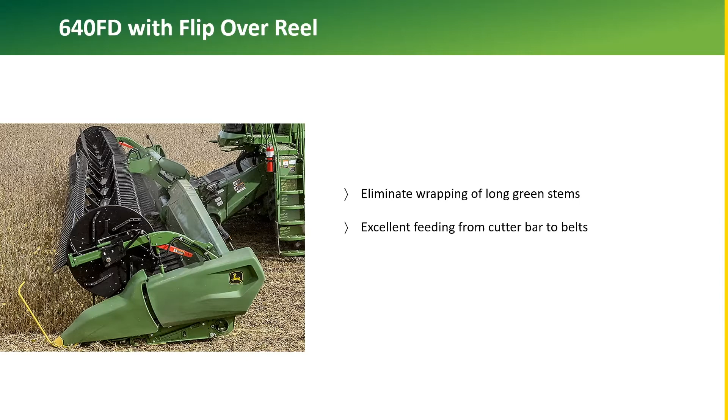Dry beans with tough green pods and stems were also a problem this year, causing some threshing or separating issues. Poor grain tank sample like this one can cause serious issues for storage or a sizable discount when selling at the elevator.

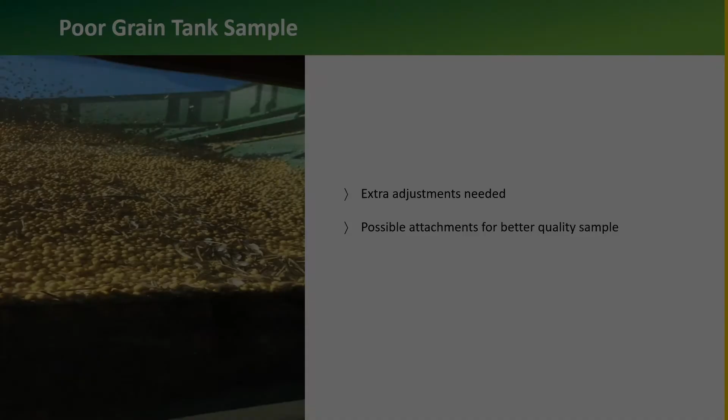These are key setting points for tough threshing separating beans that came up in our discussions. Multiple adjustments may be needed to cure this issue. Also, make one adjustment at a time and verify results, as if you make multiple adjustments, the results can worsen without knowing which one of those adjustments really caused the problem.

Make small incremental adjustments, sometimes an adjustment as small as 1 millimeter on the chaffer sieve or concave, or 20 RPMs on the rotor can make a very big difference in your quality. Tighter concave versus faster rotor speed seemed to be a noticeable difference this year, according to many reports.

Keeping the machine full as much as possible is another key to consistent threshing and separating, so pushing your cutting ability can make a difference.

This is an important consideration when it comes time to maintain your header's cutting performance, or the time for you to trade heads and match the size of head to your combine, as too small a head or a poor cutting ability can cause you to not be able to get enough crop in to fill your combine completely.

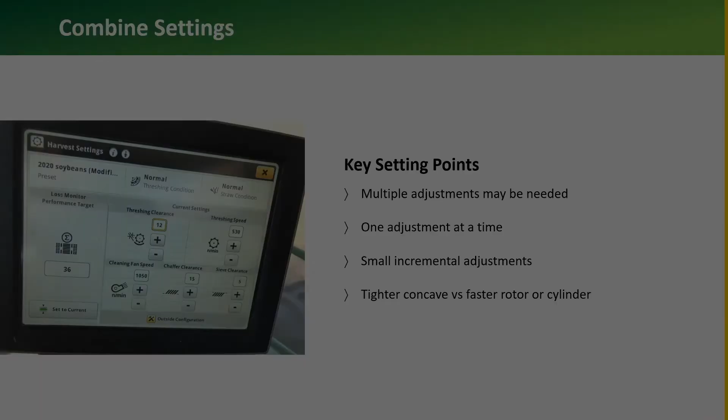Another solution that is starting to show up in conversations is a set of Kondex Revolution half-width concaves. These concaves were introduced to us at Aftermarket Expo in 2018 by John Deere as a solution for tough threshing conditions.

Shown here is a coarse grain configuration with one max thresh and one max round that replaces the first concave, followed by factory round bar concaves in the second and third positions.

Personally, I was intrigued by these concaves from the start, but last fall and this fall are the first years I have had the opportunity to get firsthand customer feedback on how they work here in West Central and Central Minnesota. The feedback I have received from local customers as well as technicians has all been very positive in beans as well as in corn.

The key factor being more aggressive threshing early in the threshing area, which also helps the separation by getting good grain out of the material mat earlier, creating less chance to carry through the combine. These concaves are available for all STS combines and can be ordered as a factory installed option in the 2021 S Series combines.

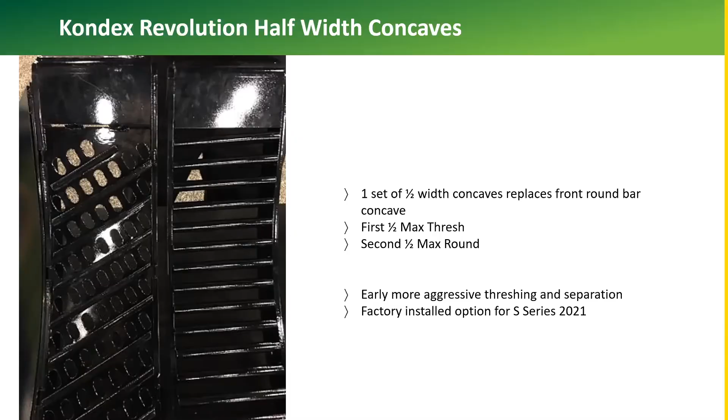Short soybeans holding on the cutter bar and not feeding well seems to be an issue every year in one area or another. We have seen many aftermarket reel additions that seem to work or not work over the years, but the one that always has been greatly helpful is the addition of an air system to your cutting platform. Whether you are using a traditional flex head or even a draper head, it has been proven that the air system can help move that crop from the cutter bar to the auger or belt very well.

Over the years, we have installed either AWS or Crary systems with very good results on both. These companies advertise crop savings at the cutter bar, which is very true. But from our experience, the biggest savings may be the even feeding into the combine, which carries all the way through the combine, reducing slugging loads and separation issues that go along with the slugs.

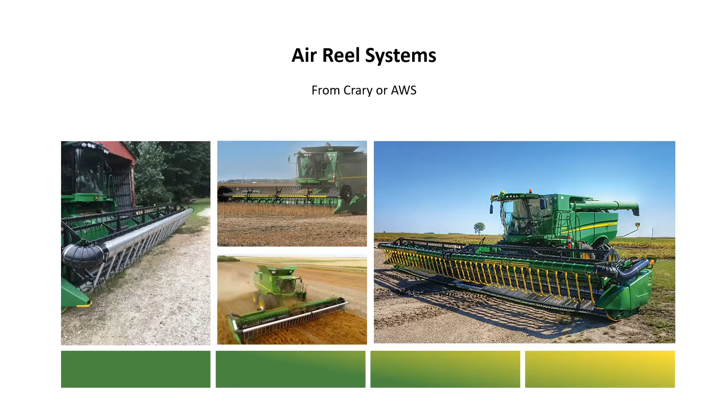This even crop flow will also be a big factor in the earlier discussion of settings and grain sample quality and grain losses. It does take power and fuel to run these air systems, but if header grain loss, bunching at the cutter bar, and slug feeding are causing losses, it may be a very good return on your investment. Not to mention the extra hour or more per day of combining you may be able to obtain by feeding evenly on those tough mornings and evenings.

High tailings loads, plugging tailings was also mentioned by customers and technicians this year. Again, this comes down to a combination of multiple settings and possibly multiple attachments. Excess threshing speed is one of the main factors, along with concave clearance, fan speed, and chaffer and sieve openings.

The issue of too much rotor speed causes severe stem breakage and overloads the cleaning system, making for a wider chaffer setting to save the grain, while overloading the sieve and tailing systems. A better setting seen this year seemed to be a tighter concave, lower rotor speed, and possibly the change to a convex concave, which helps to reduce the overthreshing.

If overthreshing is not the problem, fan settings, chaffer and sieve settings are the available cures for this issue and can take several tries to get the correct combination, paying attention to making small adjustments and verifying the results of those adjustments.

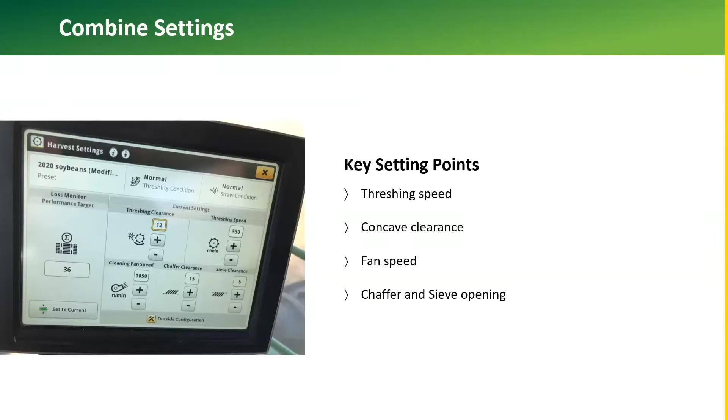When it comes to chaffer and sieves, there are also options to help you. In 2014, the S600 series combine started coming with a dual zone chaffer. The purpose of this rear section was to be able to close the rear section down farther, effectively forcing more air up front for earlier separation, therefore helping reduce tailings loads.

Factory recommended settings are 5 millimeters open on level land and 10 millimeters open on hills. But in many cases, we have seen completely closed works very well in beans. This chaffer can be retrofitted to all S-Series combines, and from my experience is very worthwhile as the cleaning fan blast always seems to be on the low side.

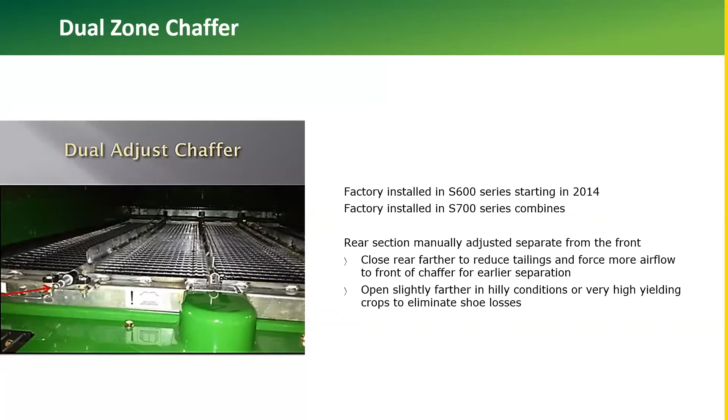In beans, maybe the most helpful change as far as clean grain tank can be the addition of change from a deep tooth chaffer and sieve to a general purpose chaffer and sieve. The smaller openings, more louvers can filter material better as well as maintain that better air blast to suspend chaff out the rear of the combine.

These are also good in the majority of central Minnesota corn combines, with the exception of very high yielding crops and the operator that is pushing for maximum bushels per hour.

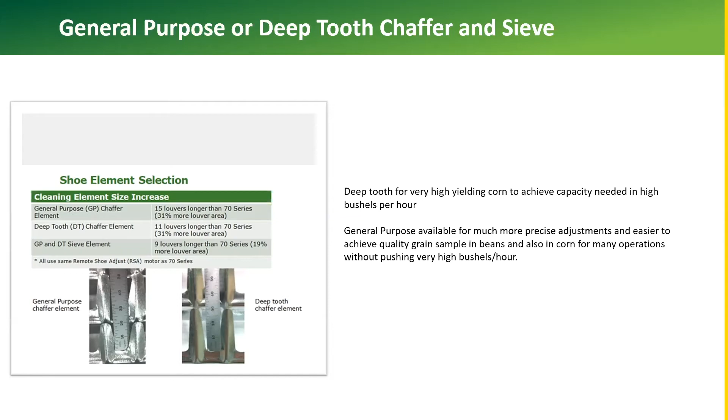In contrast to the earlier grain sample picture, grain samples like this one from a local customer are achievable with the time and effort spent to maximize your combine and its settings.

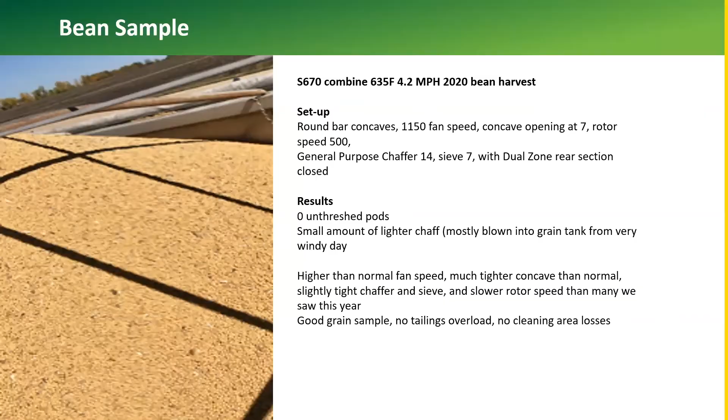The last bean challenge we have on the list for this year is plugging of the discharge beater. This has normally been a problem associated with edible beans because of the early season and the low rotor speed used to maintain grain quality, but can also show up in a year like this in soybeans with tough stems and no early frost in most areas.

For the 30-inch rotor in an S-Series combine, there is a kit available to add discharge flights to the rear of the rotor. This is easily installed and highly recommended if this issue has ever stopped your machine or if you combine edible beans.

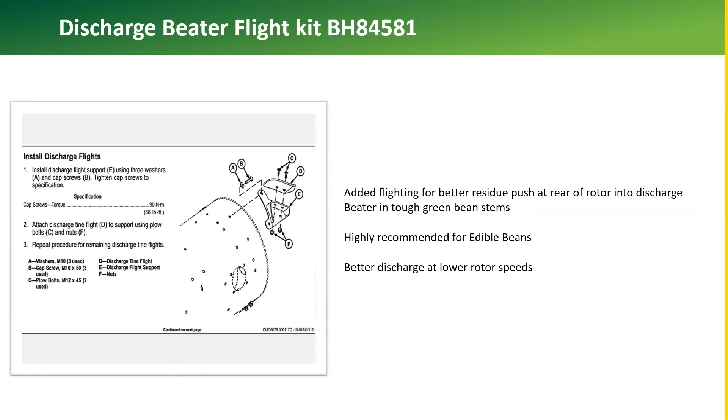As far as corn issues this year, I would say the list of issues is much shorter for most of our customers. But as always, there are still some issues that show up. Cob in the grain tank sample seems to be our largest challenge year after year with the S-Series combine.

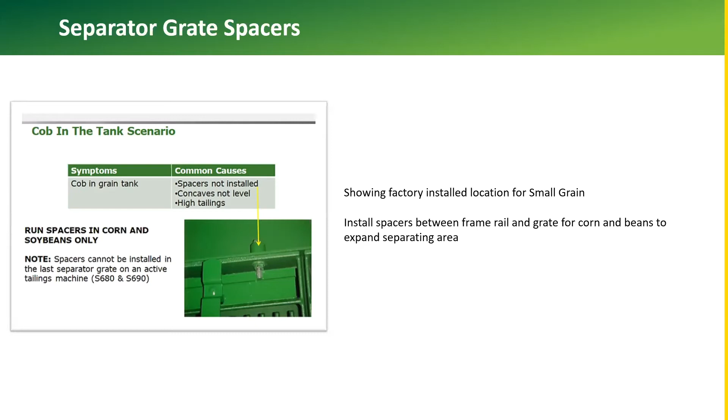If you do not have spacers in your separator grates to increase separator area, it would be a good start, along with making sure the concave is level. Also, the same idea applies to keeping the rotor speed low.

And making sure the concave is set to the correct opening to match cob size. The Kondex concaves have also been mentioned by customers as helping by aggressively threshing early to lessen the need for tighter and faster threshing settings.

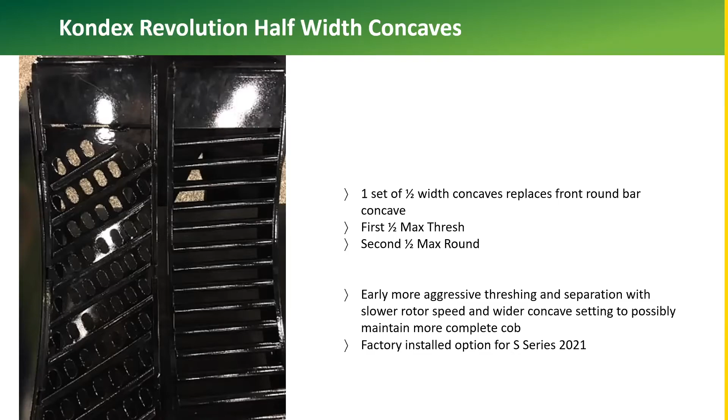But as years go by, and we have seemed to deal with this issue every year, more and more indicators point to many of our issues coming from much farther forward in the system than most of us originally thought. Having run the X9 1100 combine this year, as well as working with many customers and factory reps over the years, we have seen definite improvements in grain tank sample quality by paying attention to all the factors forward of the rotor. Starting at the front,

corn head settings like stripper plate opening, auger height, lower header speeds, and retrofitting auger floor inserts can help in many cases. In the feeder house itself, an even lower speed sprocket than the slow speed factory installed can be purchased through parts.

Kits for older combines that lower the stone trap feed plate and reversing feeder house slats to have smooth edge leading can also be an improvement.

Moving back to the feed accelerator, there are options of swept back or smooth wear plates that can cause less kernel damage while still providing good feeding action of material to the rotor. Those are several items that have been shown to make improvements before getting to the rotor and its settings required there for threshing and separation.

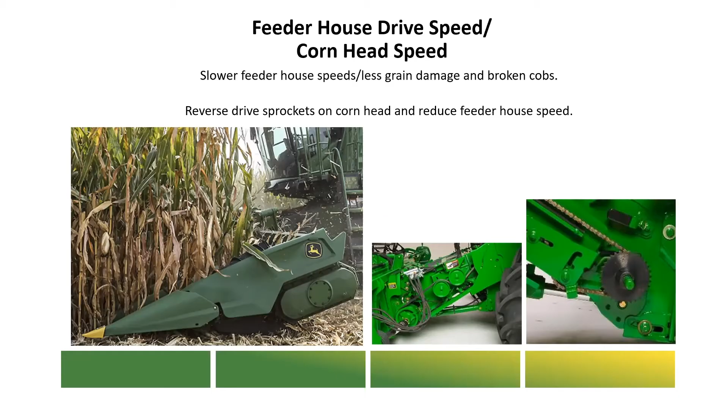We always hope for drier than normal grain sample, but it can also cause a few issues from time to time, such as fines in the grain sample or a specific cob being still too spongy, causing the cob to split before releasing kernels.

Every year, there seems to be at least one or two corn varieties, maturities, or stressed fields that cause this nearly impossible threshing problem. This year was no exception. The problem is recognizing this issue and finding out where in the process the problem is occurring.

The best investigative method is to use a power shutdown, which gives you the opportunity to examine the crop on its entire route from the head to the discharge of the combine. Many customers have mastered this, and many still struggle, but the power shutdown is a very helpful tool.

If you are unsure the steps involved, a good place to go is the John Deere App Store and download the Go Harvest app. This app contains a complete guide to adjustments as well as the step-by-step process of doing a power shutdown. Or if you are still having problems with this, contact us at Midwest Machinery and we will help you find the correct information.

After using power shutdown and exhausting all the other procedures we have just discussed, you may still have an issue where a particular cob is just too spongy to allow good threshing without the cob exploding into small pieces.

This year, I talked with one customer who had exactly this problem with corn that was only 21% moisture, but the cob was so spongy and split so easily, it was nearly impossible to separate all the kernels. Going through every available option and still having loss levels unacceptable, he called his seed rep, who said he had heard the same comment from another customer.

High trash intake and separation issues are more of what I expected to see in a year like this, and it was present in many cases.

Deck plate spacing and proper corn head or feeder house speed are the two common settings to work with on this issue. Although I think one of the most common issues we have seen over the past few years for this problem is worn stalk rolls. Many times we don't even realize the amount of wear on our stalk rolls, especially with a chopping head, because in general it strips stalks down through the head very well, using the extra pull of the chopping knives as well as the stalk rolls themselves. Or in many cases, we just overspeed our head anyway to make sure we are running fast enough to do a good job of chopping.

But if you are looking to replace stalk rolls, there are options that have different fits for your normal crop situation. A chart like the one shown here is available in the sales manual with different stalk rolls and their strong points, to help you in your decision on which one to install. Considerations like power consumption, residue sizing, trash intake, and normally wet or dry stalks are part of the discussion.

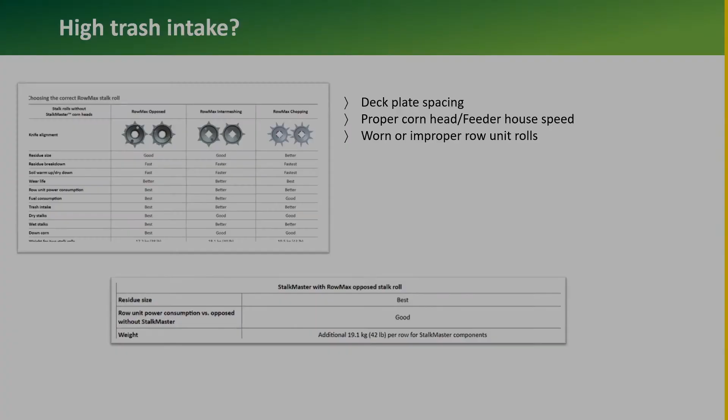When trash intake cannot be eliminated, the issue normally becomes loss of crop out the rotor. The best option I have seen to help with this issue is to install one heavy-duty separator grate in the front grate position, along with 4 interrupter bars or more spaced throughout the grate. This is a cast separator grate with bolt-in bars, originally produced for rice, but works well in other heavy crop situations, adding an interruption to the crop flow for better separation. The second option is faster rotor speed, which causes other problems. The heavy-duty grate with interrupter bars can be a very worthwhile investment.

Yield monitor accuracy also never seems to completely leave our discussions. The introduction of active yield has replaced the need for calibration of the yield system. Using the mass flow sensors and a set of weigh pads in the grain tank, the system adds a calibration automatically when the grain tank is emptied and then refilled. There are several criteria that need to be met, such as not being on a side hill, having a consistent input, being completely emptied, and then refilled beyond 6,600 pounds. Once these have been met, a calibration will be entered into the system, comparing the mass flow estimate with the active yield estimate.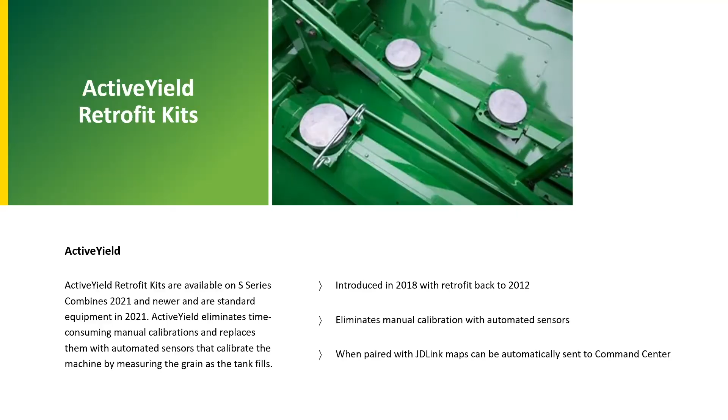John Deere's best practice says the system should have all previous loads deleted when starting a new crop and let the system work until several calibrations have been registered. While doing this, some loads will be eliminated from the calibration process because of the issues I mentioned, but throughout the day, many loads will be captured. Then a simple correction of a percentage over or under can be entered to match scale weights.

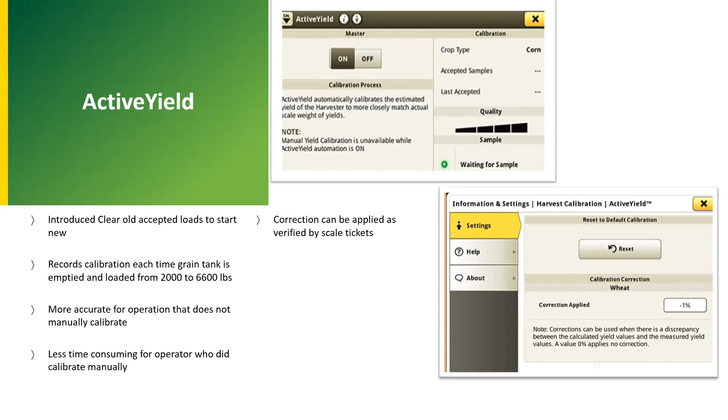This year, I heard mixed results on accuracy of the system. From one customer saying all crops were within 1% of what scale tickets showed compared to the yield monitor, to another customer that had to enter an 11% additive to get good readings. That being said, the simple correction of a percentage over or under is still easier than several manual loads of calibration. The other thing to remember with this system is that while it may vary from load to load, it is really more accurate when looking at field by field totals on a large scale.

Tillage this year seemed to focus around residue management, soil compaction from previous wet years, and a tillage angle as it relates to high-speed planting.

A relatively new tillage piece for us this year was a 2680H high-productivity disc. This machine features two gangs of individually mounted discs with 10-inch spacing, with the front rank at a 17-degree angle and the rear rank at a 14-degree angle, and a working depth up to 6 inches. This is a very aggressive machine.

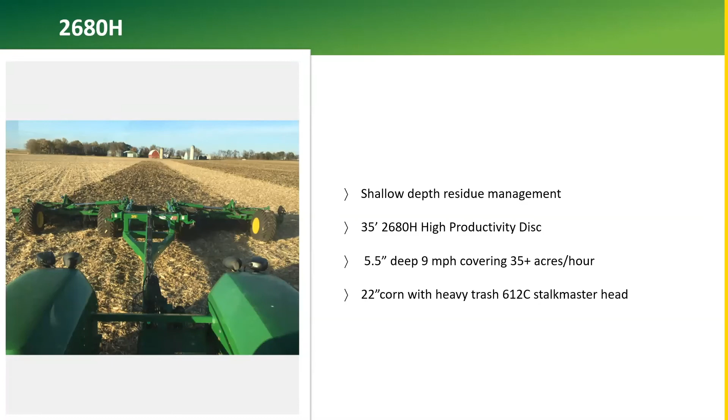The 26-inch front disc blades cut and bury residue very well while the ripper loosens compacted soil. The rear conditioner helps level off the ridges, and the optional knife edge rolling basket levels and breaks up clods for a more consistent surface. Over the past several years, the 2730 has been found to be a very effective tool in nearly all conditions and situations, as well as being a very trouble-free tillage machine.

With John Deere TrueSet machine control, the ability to make depth adjustments from the cab or run prescription tillage can be a game-changing tillage system by adding the ability to do more or less aggressive tillage throughout the field where needed, and possibly reduce costs by doing that.

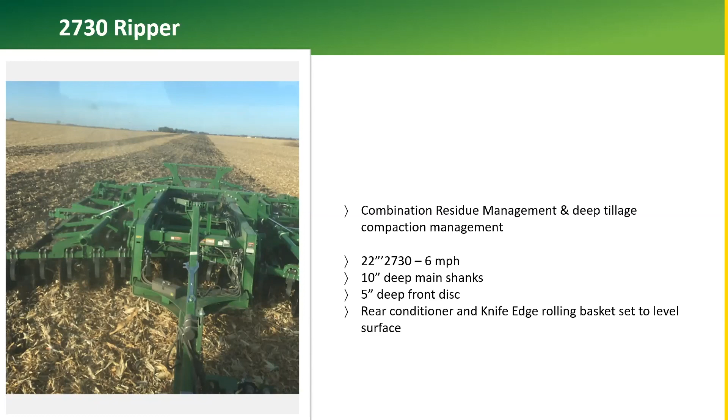With the move to higher speed planting over the last few years, I had several customers call me this fall to discuss thoughts on what they should be thinking about this fall as it relates to their high-speed planter. This is a very good question, and one that has always been around, not only for high-speed operations, but for any planter accuracy.

Obviously, residue management and soil compaction are going to be your main concerns. But I believe when it comes to planting into this ground in the spring, ride quality of your planter also becomes an increasingly important piece of the conversation for all planters.

With ride quality in mind, I think the main part of the conversation that is new for some customers is the angle of the tillage pass. What we have seen over the past few years is many people changing to a much less angle of tillage in the fall, and very little or 0-degree angle in the spring. All of this is dependent on what type of tillage you are doing in both seasons.

But the key to remember is ride quality is the key for traditional planters without trench delivery systems, and ground contact is the key for high-speed planters with trench delivery systems. Ridges and wheel tracks at an angle across the field will cause both problems. Less angle leaves less ridges to cross, making for better ride quality and more consistent downforce settings to obtain consistent ground contact at high speeds.